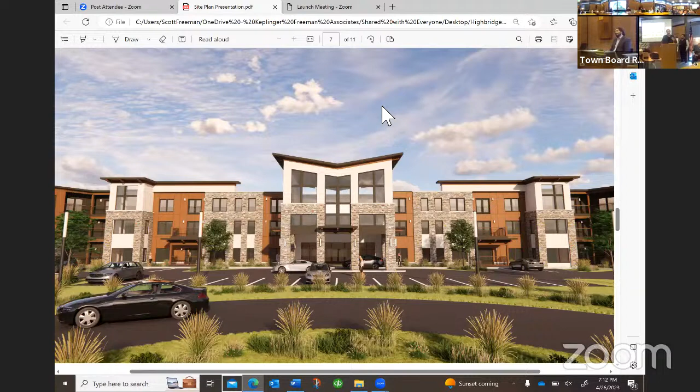The reason I took that project, the reason I'm taking this project, is I believe it's a good project. I looked at your comprehensive plan, which talks about satisfying the needs of housing in our community. Obviously you've got to balance that with what's surrounding the community when you do a zone change, but I try to keep it really simple. The way I look at a project when I'm going in for a zone change and site plan approval is: is it good for the municipality? Is it good for the town? Is it good for the developer? Is it good for the community?

To add a little color to that, when I say the municipality, does it satisfy where the municipality is going from a development perspective? Reading your comprehensive plan, sitting with it today, I think this squarely fits there. You have residential, you have R5 across the street. The residential sits higher above this site, so it's the buffer. You've got the commercial there, but to keep it commercial doesn't satisfy the needs of the town. You're going to have higher traffic counts, intensity of use. I don't think residential's right there.

That's my personal opinion, but multifamily gives you that buffer from commercial to residential, creates connectivity with the community — a lot of the things you guys are looking for, along with satisfying the housing needs of this community. What we're trying to do is hit that 55 and older community. I'd say seniors, but I'm going to be 55 and I don't think of myself as a senior. So, 55 and older apartments, 1 to 2 bedrooms, 70 plus or minus units. It fits the needs, in my opinion, as a transition with Brookdale, along with the community.

900 square feet, 1,300 square feet for 2 bedroom, 900 for 1, with a lot of amenities for the people. It's close to the community, offering the amenities, so it's just a logical transition of zone change. That's good for the municipality, good for the community, satisfying those needs identified in the plan — keeping these people in our community, keeping people like me who don't want to maintain a home and pay taxes, and not leave our community, plus attracting those kind of people to our community. So it satisfies that need from the community perspective.

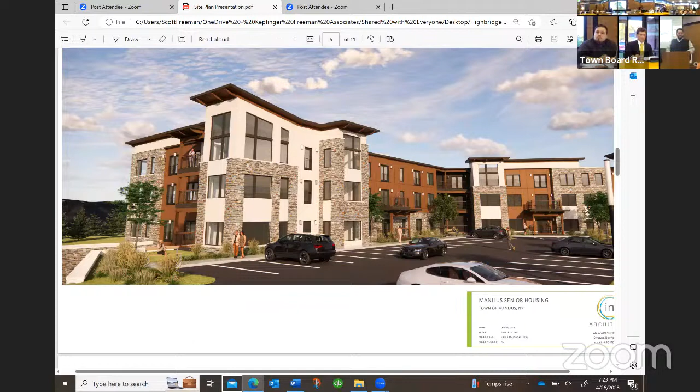The size of the structure is approximately 32,000 square feet per floor, and it's a three-story structure containing somewhere in the mid-70s units. Right now we have planned 78 units within this structure, a combination of one-bedroom units and more two-bedrooms than one-bedrooms.

As you approach the center of this structure, the main piece here is an enclosed and covered vehicular porte-cochere where residents and guests could drive underneath, weather protected, to unload groceries or pick up a relative under a weather protected area. That's the V-shaped section here in the center.

The common height along our parapets, for the majority of the building, is 32 feet. The winged roofs along the center and at the ends of our building are below the maximum of 40 feet, which is the zoning requirement. So we've kept below those requirements from a zoning perspective.

As we go through these images, this one looking from above shows the parking and how it's engaging, with a lower level of enclosed parking for the residents. You'll see an entrance here off to the left that goes below grade, and we'd be providing one enclosed parking space per unit, plus a second parking space on the exterior of the building on the site itself. This reduces the amount of asphalt and covered ground by doing a lower level of parking, and also gives weather protection and access to the senior population that will be occupying the structure.

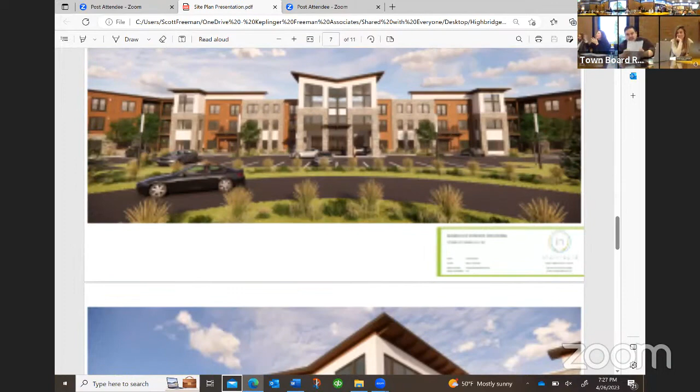Are you going to tell us how you're going to make it look prettier? Because it's not a very desirable parcel at this current time. No offense to anyone who thinks otherwise. No, it looks nice, that's why I'm pretty excited about what we're thinking. Yeah, no, me too. Can I just do the reference to our draft comprehensive plan? It's great. Yes, thank you for that, we appreciate it. Yeah, it's kind of fun. Right, isn't it great? Yeah.

We haven't, this is a preliminary package, so the graphics, planting, and parking you see before you are preliminary, we're going to enhance that. But I have 6 or 7 points I'd like to talk about, even though Anthony covered a lot of them.

Have you guys heard of Plan Onondaga? Yeah, if you read that, it's right there. This is infill development, and all of our housing projects that we submit to the county come back within urban areas, and they give us a pat on the back, they support it. Infill development, if you're not familiar, is developing parcels of land within our cities, villages, and towns, because the infrastructure is already there. They're walkable communities, it's more cost-effective development. You're raising the density, promoting local businesses, it's everything that's in everybody's comprehensive plan, so we're very honored and really want to see this thing go ahead. So I have to say that in infill site development.

Now, how do you get up to the 100-foot top of the mountain and the bottom of the mountain? There's going to be some engineering concerns. There's a big slope there, so we're going to have to work with a geotechnical engineer for the foundations, to figure out where the footings go. We're going to have to do a site test to figure out the permeability of the soil and the drainage. The drainage was already done preliminarily, there's already a basin there, but that was done old school. The new regulations will require some of this, the quantity storage, but we're going to have to do some pre-treatment. So around the building we'll have a lot of depressions, and if the soils are well infiltrating, it'll be maintained by a grounds crew. There'll be rain gardens and bioretention areas, again, more LEED-type things, more green practices.

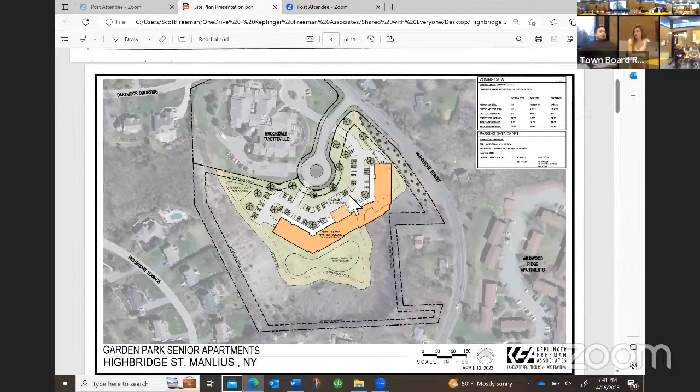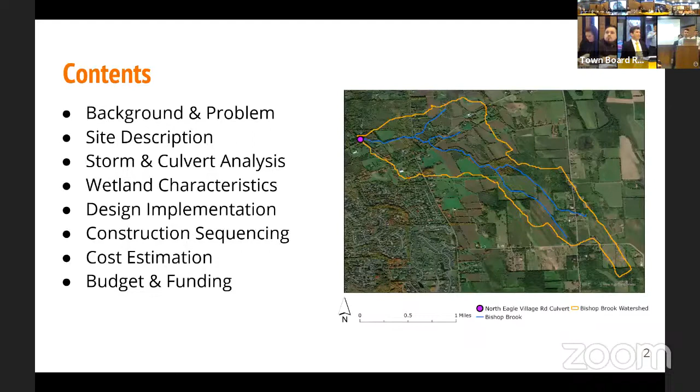As a lot of you know, there is an issue at North Eagle Village Road where there is a culvert that has been increasing in flooding, causing damage to properties of some residents. Additionally, there's damage to the highway, and recently there was a flood on the 5th of April.

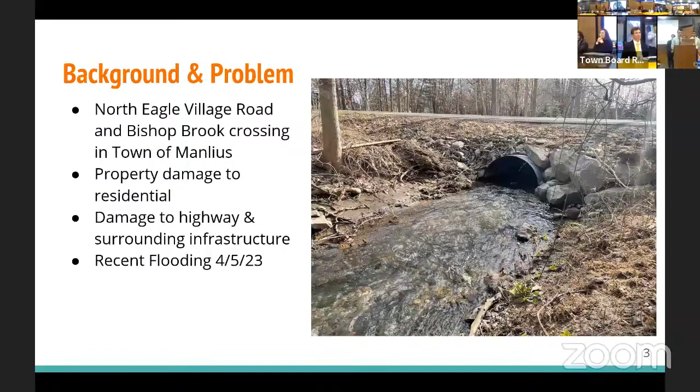We have a lot of pictures and video of what this flooding has looked like, especially during the really rainy summer we had last year. This is video obtained from residents on North Eagle Village Road showing the part with the most damage during the flood event. This video was taken in October 2021.

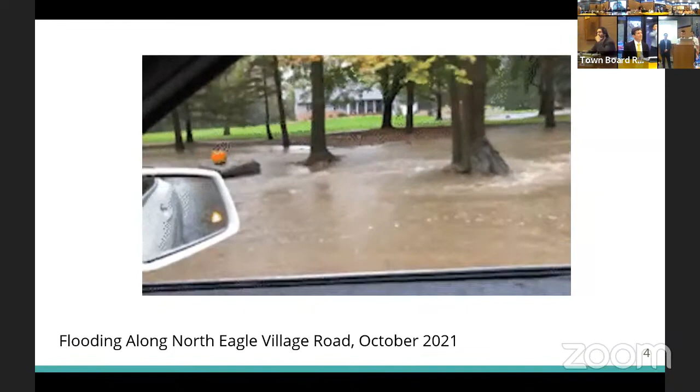Our team went to the site for visits twice and had conversations with residents, asking for further information about the flood. So we're trying to solve this problem.

We took into consideration a few solutions to fix it. Of course, as a baseline, no action was considered, but with the increasing trend in climate change, it's more than likely not going to be a viable option, especially cost-wise.

Increasing the channel or culvert size was also considered, but as some board members brought to our attention, there is the village of Fayetteville right downstream. Increasing channel size just moves flooding downstream and causes problems for the village of Fayetteville.

We considered retention tanks to store volume from the storms, but as some of you may know, the high bedrock level at that site makes it almost impossible, without blasting, to get a significant amount of volume in there to control the flooding.

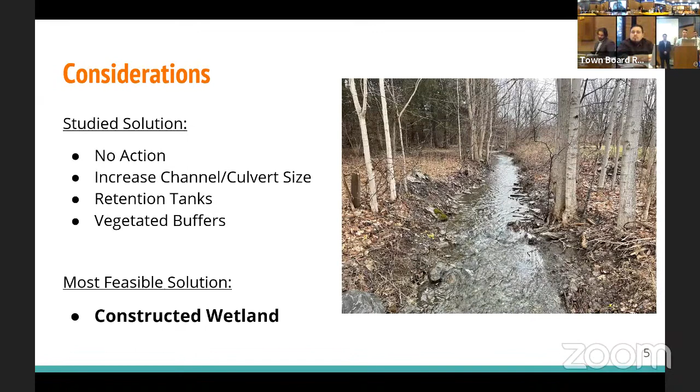Another option we considered was vegetative buffers along the stream, but since the town and watershed is a very steep and hilly area, about 8% average slope, and vegetative buffers only work up to a maximum of about 5-6%, it's not a viable option. So we settled on a constructed wetland as the most feasible solution.

Knowing the land cover of this watershed is important to understand how much water from storm events infiltrates into the soil versus how much runs off directly into the stream. Forests will infiltrate a lot of that precipitation, whereas other forms of land cover contribute more toward surface runoff, which is a huge cause of this flooding.

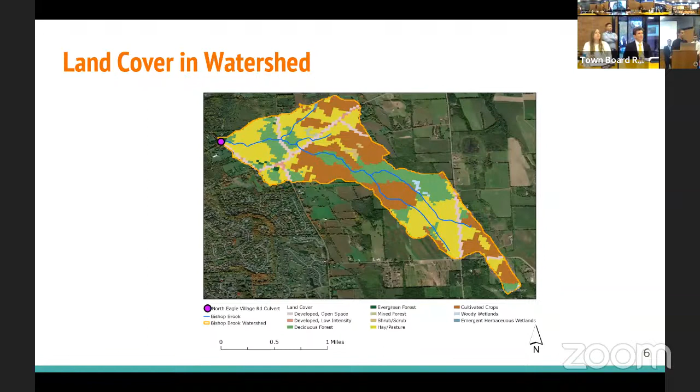So now moving into our design storm analysis. This is basically looking at what size storm we need to think of when further designing on this project.

And we did this with a peak runoff formula, which is C times I times A. Starting off with C, as Jacob talked about, different types of soils have different types of runoffs and infiltration rates. So this value of 0.27 is a weighted average of all those different soils in the watershed.

Moving on to I, we found this by using the chart on the right. On the horizontal axis is hours, and we assumed a storm event of 1.2 hours. So we went to 1.2 and then went vertical, which is where you can see that dot just under 2, getting the I value of 1.89 inches per hour.

And A is simply the total area of the watershed, which is 691 acres. Multiplying all that, you can see for the 100-year storm, there would be 384 cubic feet of water per second going through the culvert.

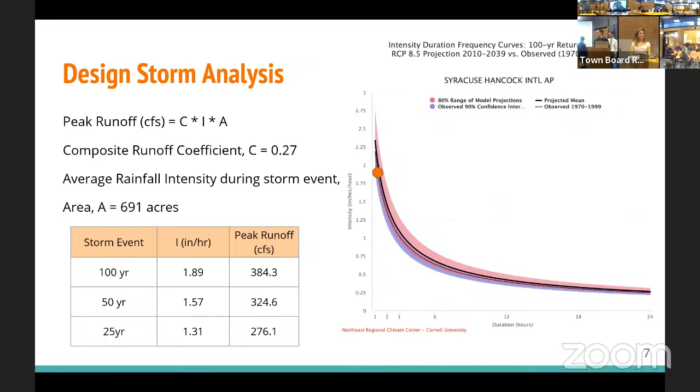And now we're gonna talk about the culvert. The culvert shown here is the culvert underneath North Eagle Village Road, and is the primary restriction causing the flooding at this site.

So to better understand this flooding and how to mitigate it, we need to know how much water this culvert can handle. We decided to model this as an arch pipe style culvert. There's a diagram in the bottom right corner of the screen here that depicts it.

We went to visit the site, took some measurements, and measured the culvert to have a height of 38 inches tall with a width of 58 inches across. We also estimated a max depth of flow of water at this culvert of about 20 inches before flooding would start occurring at the banks just upstream from that culvert.

And the material of this culvert is important as well. It is a corrugated steel pipe with a gravel lining on the bottom. This is important to understand how much friction that water is fighting against as it's flowing through the culvert.

Also important in understanding this capacity of flow is the slope of the culvert. We estimate this to be 0.05. This came from just geographic data at the site.

With this information, we calculated a maximum capacity of flow through this culvert to be 99 cubic feet per second.

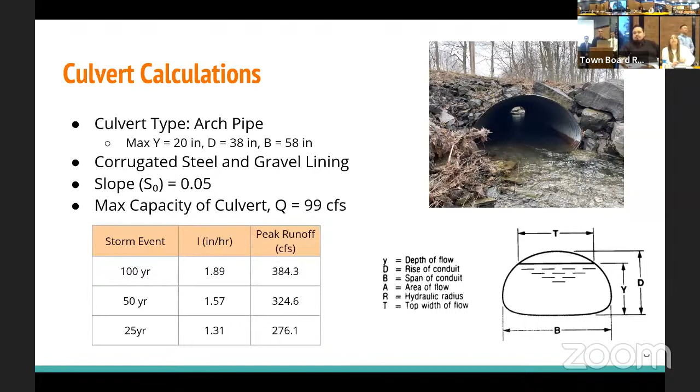So based on these calculations, we decided to make a wetland. So what is a wetland? A wetland is a distinct ecosystem that is characterized by the presence of water, permanently or seasonally, at or near the surface of soil.

The wetland is a transition area just between the soil and the water, where the soil is more saturated with water.

So we talked about what a wetland is. Now we're going to talk about how we could make one.

The first step in constructing an artificial wetland is site identification and analysis. We want to make sure we're building the wetland at the right spot. Some of the characteristics we're looking for lie a lot in the soil—we need the soil deep enough to dig storage basins into the ground, and we're looking for soils with desirable plant growing characteristics. We also need to do an extensive survey on the microtopography of the site to better understand how much landscaping we need to do to create a wetland.

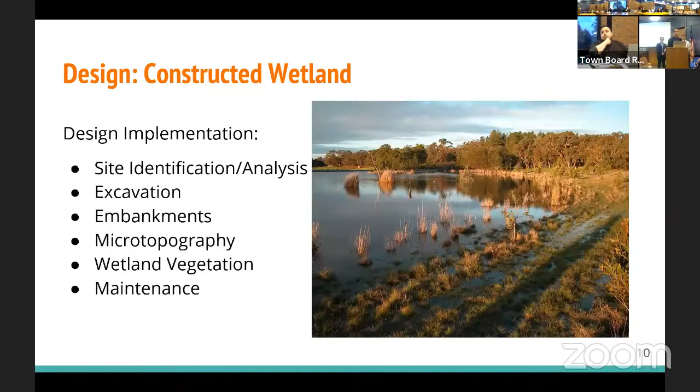Also part of this design is vegetation. Native species capable of handling constant inundation will be planted on the site to prevent erosion and to provide food and habitat for wildlife and the ecosystem. Maintenance of this wetland would include reseeding events to ensure the vegetation grows strongly and continues to grow.

So this is an example of an aerial view of an extended detention shallow wetland, from the New York State Stormwater Design Manual. As you can see, there's an inflow just above the base flow of the perennial stream that would flow into the wetland itself, into a forebay.

And as mentioned, microtopography and site location is an important factor in the shape of the wetland. Since rock is an irregularly displaced material, there would be areas higher or lower than others. So based on a site survey, you might have a possible island within the wetland, and the goal is to have the longest flow path throughout the entire wetland to absorb as much volume of the stream as possible.

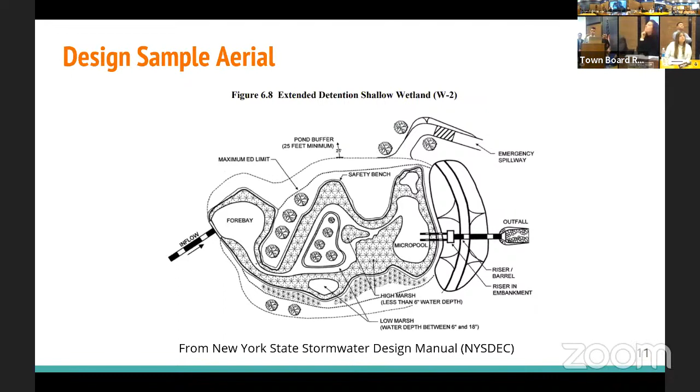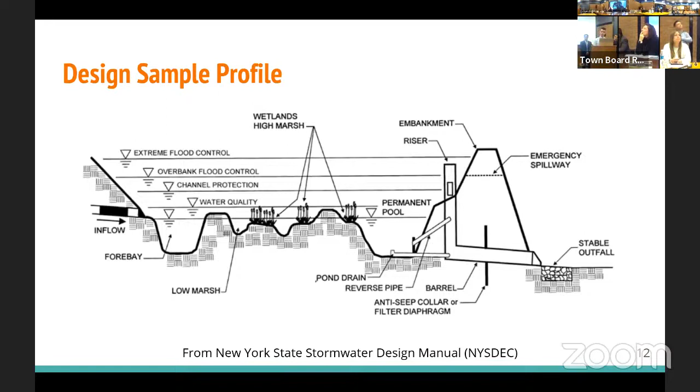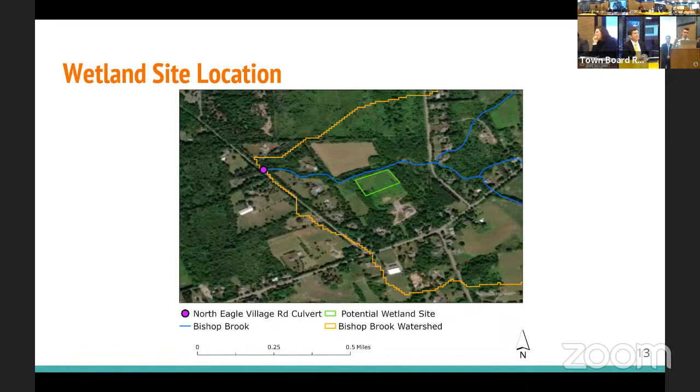This design location was chosen right next to the stream itself to feasibly do it. We would want to choose a location based on, of course, the residents—that is, open land. We don't want to remove any highly forested areas because they are more effective at reducing runoff.

So now moving on to how long we think this would take. In total, we estimated just about 6 months. First, we would start off with getting the land, and although it's fairly large, we recommend doing this in the winter months since we wouldn't be able to dig on the land until it is fully thawed.

Once that's done, a full site survey is done just to make an account of all the brush and trees that need to be taken out. Once that's done, they'll be removed, and then actual excavation will start, and once this starts, erosion control will also begin.

Since our site is right next to the stream, we don't want to put any excess dirt or dust into the stream, so things such as silt fences should be put up. Once that's done, seeding will start, moving into vegetation stabilization—making sure all the planted vegetation has roots deep enough so the first storm event won't wipe them out and throw them into the stream.

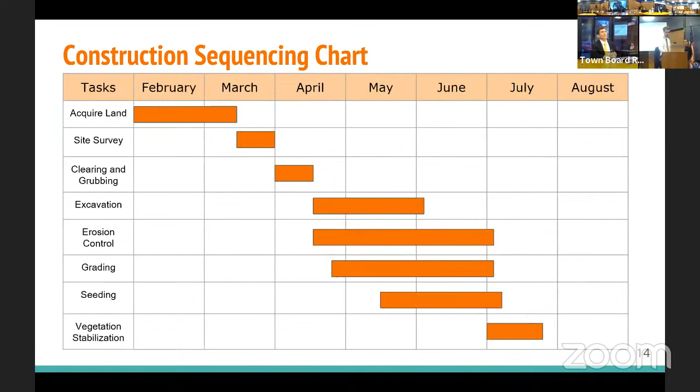So basically, we calculate our costs based on the size of different storm events, and also the size of our wetland. According to our calculations, we typically need a 3.16 acre wetland for a 25-year storm event, 4.3 acres for a 50-year event, and 5.7 acres for a 100-year event.

First of all, we need permission for both construction of the wetland and also the excavation part. The excavation is the majority of the total cost, almost 80%. Then we need our seeding, sodding, and also grass channel for our vegetation part.

Using the New York State standard and specification of erosion and sediment control manual, we calculated the maintenance fee, based mostly on the vegetation area of our wetland. The last part is our labor costs, including the engineers and workers.

Based on the calculations, for the 3.16 acre wetland, which takes care of the 25-year storm, the cost is about 1.3 million. This is the least costly plan, and that's what we recommend.

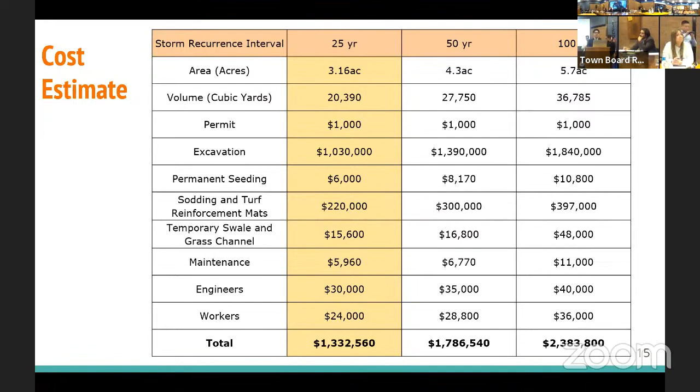Moving into budgeting and funding, prior to funding, we all need to run for office, or serve in local government, or on your planning boards wherever you live. So we've seen our comprehensive plan appear tonight and our budget. Wow, brownie points, yeah, it's like the best night of my life.

Thankfully, you joined the Climate Smart Community in 2020, so you are automatically eligible for the Climate Smart Grant. This is a 50-50 matching program, so the cost of the project instantly would be cut in half. With this, it's anywhere from $50,000 to $2 million, so you could go up to the 50-year storm event as it is under 2 million.

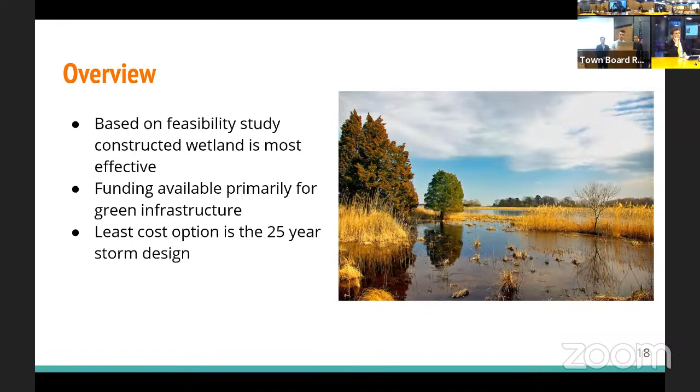So as an overview of what we presented today, based on our feasibility study, the wetland is the most effective and most feasible option. Funding for projects such as stormwater management are trending towards green infrastructure, giving more likely ability to get funding. Our least cost option recommendation for the 25-year storm is based on a smaller footprint, 3.16 acres, with less disturbance to the area. Here are our references.